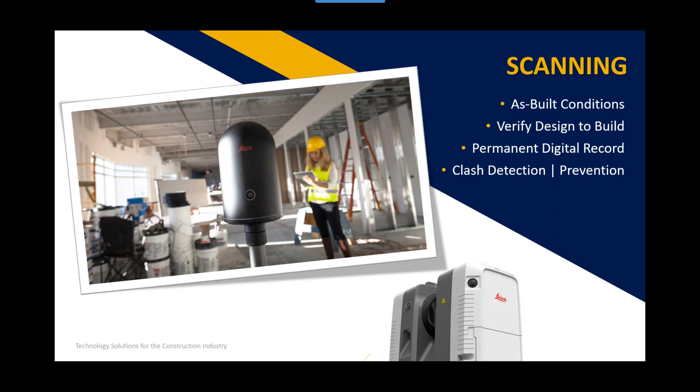And lastly, where 3D scanning comes in handy is in clash detection and prevention of problems. Trying to have foresight, looking forward to preventing an issue rather than allowing it to happen and then having to fix it later.

So, what is 3D scanning? Essentially, precision measurement. A scanner shoots a laser beam out and measures its return, and it plots that in a file while you don't see it. It's a mathematical equation on an X, Y and Z axis that gives you, depending on which scanner you're using, tiny millimeter accuracy over some distance. And so this way you're able to very quickly determine measurements without missing anything, without having to go back, and we'll talk about that in a second.

So when the scanner shoots the laser out, it creates a point cloud. Now, we all know from the 2D scanning world that we're going to create a raster image, and that's just a series of dots that represent what the scan is. Well, to a certain extent, that's what a point cloud is, except it's vector-based information. So a point cloud is essentially where the laser hit and measured back, and so you're able to get, based on density, a much better, accurate representation of what you've actually pointed the laser at.

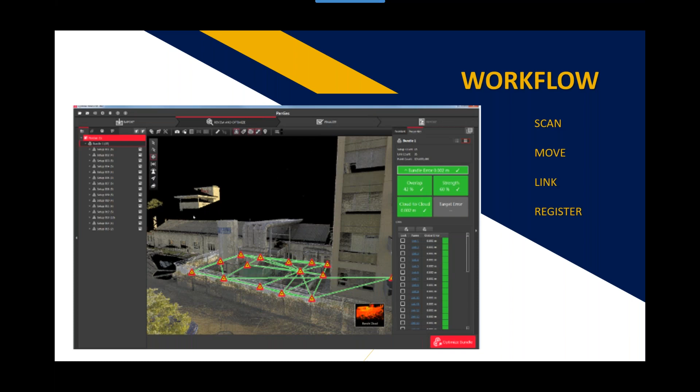The workflow is fairly simple. I say it's fairly simple, but the other folks are going to tell you how complicated and how much work it is, and it really is. I come from it from a different perspective. But you have to scan, you move the scanner, you overlap as much as possible, you link your scans, and you register the images. And that sounds really simple, but there's a lot of work that goes on behind it. So just to give you an idea how that work looks. So these are the basic areas.

Like I say, the as-built conditions are a huge thing, and they are. BIM modeling is also an opportunity for scanning. They scan in the oil and gas world, especially for piping, and we'll see an example of that in a second, that relates also to wastewater treatment plants. Architectural documentation, especially historical objects. The measurements are so tight that you can put that together quickly, easily, saving the file, and having that for archival purposes.

The construction laser scanning, I mentioned the pours, and we also get into ground penetrating radar at some point in time, and power process and plants, and that's all going to go mixed together with oil and gas and the water treatment. Here's a couple of examples. This is the University of Maryland. They basically scanned this building. Scanners do not see through walls, so if you have a classroom building, there's lots of movement, lots of scans. The point cloud was created, cleaned up. The CAD file was created, in this case in Revit, and then rendered. So all the steps to a final deliverable.

And Joe can probably tell you exactly how long this took, but as I recall, this contract was approximately a $50,000 contract. In terms of the hours, it worked out to be about $200 an hour to get to that point.

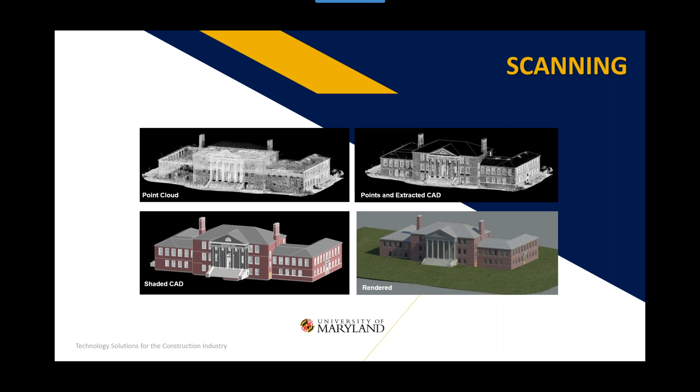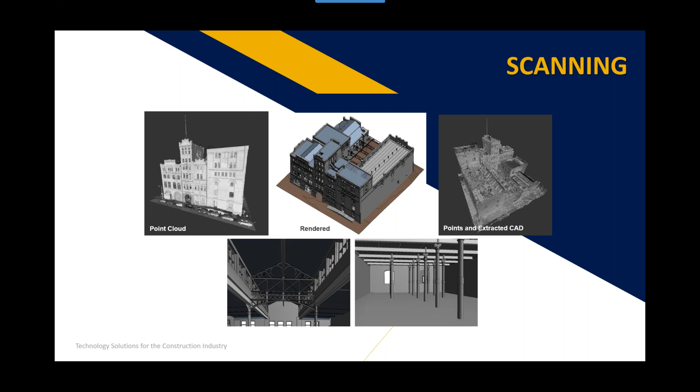Another example, a brewery in Tennessee where they were repurposing an existing structure to make loft apartments. So they had to come in and scan. Once again, you had the point cloud created, the whole image cleaned up and then rendered to CAD, and then ready to put into Revit to build out the loft apartments. The National Aquarium is another example. Here we're going to look and see if something will fit where it needs to be. They needed another water pump.

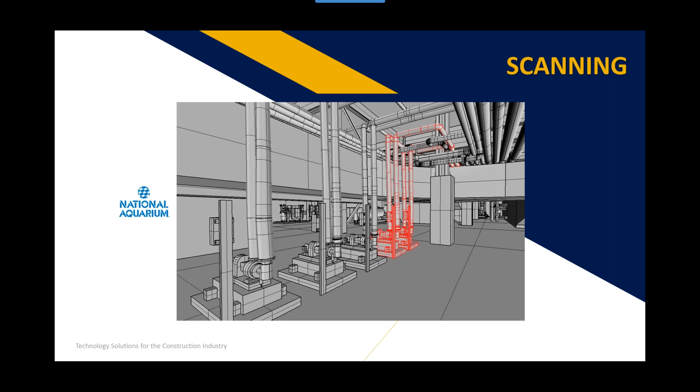This is the existing area where the water pump needed to go. They wanted to model that ahead of time, so you needed accurate dimensions. They scan, basically create the CAD, put in the next water pump and route the pipe around the existing pipe so that you can see exactly how it's going to go, how it will fit, so that they can design that and then actually put things in place. So, pretty simple in what the purposes are for.

But there's value all across the scanning spectrum. From conceptual condition surveys, which we just looked at with the piping and the pumping, to design. Basically you're going to do a renovation, so you want to attach to the as-built, make sure that you have everything correct, and validate the concept. The verification process, eliminating change orders and reducing delays and costs. If you keep the subs honest and do verifications at each milestone, those are service opportunities for the reprographics provider to maintain a position in the as-built chain.

And then lastly, many of you may already have closeout programs or some form of closeout that you work with your customer on, and 3D scans are fitting nicely into closeout and facilities management. That is the owner's manual of the building and how to run it and how everything is put together.

One of the things I didn't mention there is what we're starting to see a lot more of. As something is built, you do a 3D scan of the existing area before the skins are put on, the walls are put on, so that you can see the wiring, the plumbing, and all of that. And then you can geotag, that is, maybe take a photo, put it actually into the scan, add some text to it, and give instructions as to, well, that's the main electrical line, or this is the sewage plumbing here,

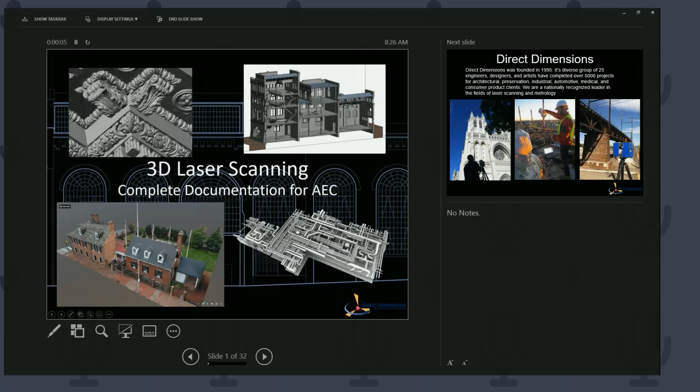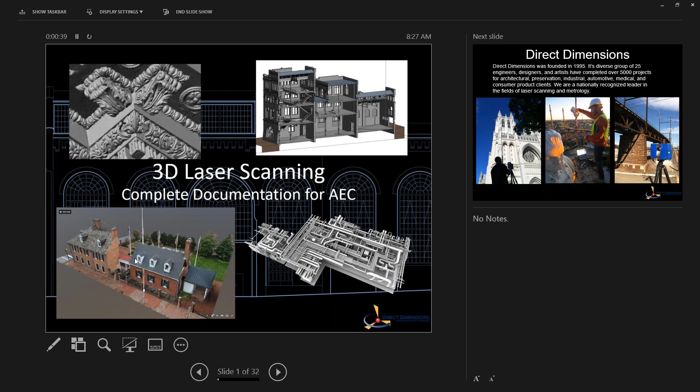So, as I said, we're at Direct Dimensions, founded in 1995. There's 25, maybe up to 30 of us now. We've done thousands of projects, and we're not just in the AEC space. We're doing historical preservation, we do industrial stuff, we do a lot of military applications, we do medical. We just finished scanning all of the props, sets, vehicles, and actors for the last Avengers movie. Hollywood's a big space for us, and they are scanning everything for those movies. It turns out Robert Downey Jr. cannot fly.

So we got people trained across all different industries. That's a question that we get asked a lot: who in your firm do you send out to do this work? And the scanners have gotten very user-friendly. The best background you can have is knowing how to run a computer, honestly. But we have engineers, we have designers, we have artists. My background is actually archaeology, and I came into this from a scanning historic sites perspective. I've been doing this almost 20 years now.

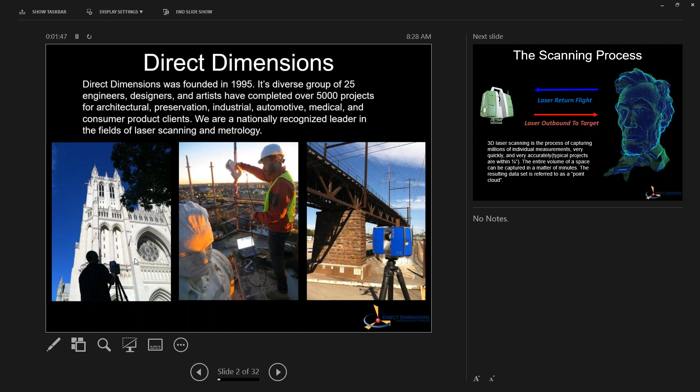As Keith said, this is the scanning process. So you're capturing millions of individual points, and the resolutions and accuracies you need are going to vary. We do everything from an open pit mine to literally capturing fingerprints. It can all be done with laser scanning.

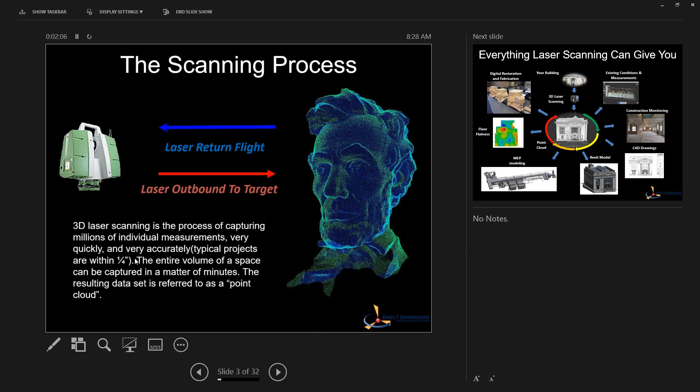Here's a little bit of a busy graphic, but this is what we're talking about. So you go out and you scan your building, and then you get the point cloud, and then these are all of the different things that you go to from there. And I'll try and zoom through a case study for a few of these. And as you can see, it gets harder the more involved you get in these.

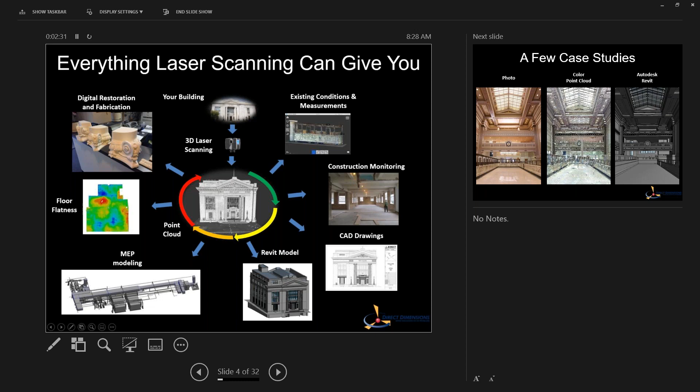There's just a quick side-by-side. It's a bank building in DC. So there's the picture of it, and there's the color scan, and those are just millions of individual points in the scan. And there's the Revit that we derive from it.

And I guess maybe that's a point I should make right now, is that we're kind of involved at all levels of this. We'll go out and do the scanning in the field, and we have clients that will just take that point cloud data. And you'll see this as you go out and talk to these AEC firms. They're at all different levels of sophistication when it comes to this.

We have clients that'll just take the point cloud, they say thank you, and then they go and do all the modeling themselves. We have clients where we have to do all the modeling. We have clients where we're doing the modeling and the drawing, and we're involved in all different levels.

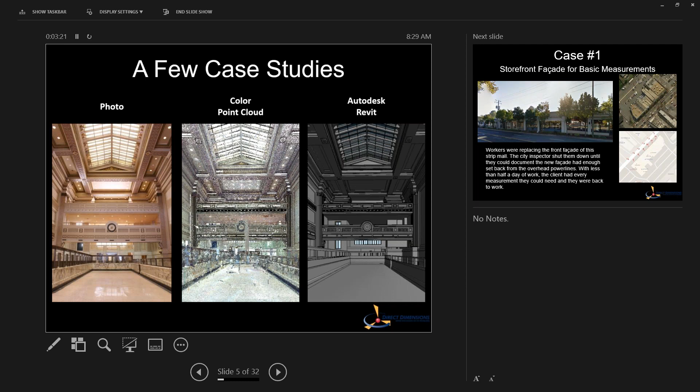Case one, this is a real quick one. This is just the point cloud. They're redoing the signage in the fascia of this strip mall. So the inspector happened to be driving by, said, hey, you've got scaffolding too close to those power lines. Well, he just made that judgment call and shut down the site. So how far were they away, really? Well, we ran out. This took maybe 2 hours. We ran out there from our office.

I should mention that too. Our home office is in Baltimore. I'm personally in Olympia, Washington. We have people in New York and people in Detroit now, I believe.

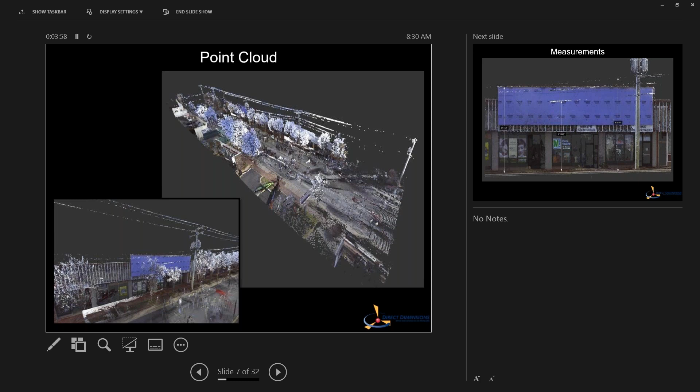This is outside of DC, so we just sent someone out there. They were on site in an hour. They took these measurements, and really quickly they're able to turn around and get all of these distances, all of these offsets, and the job site's back up and running.

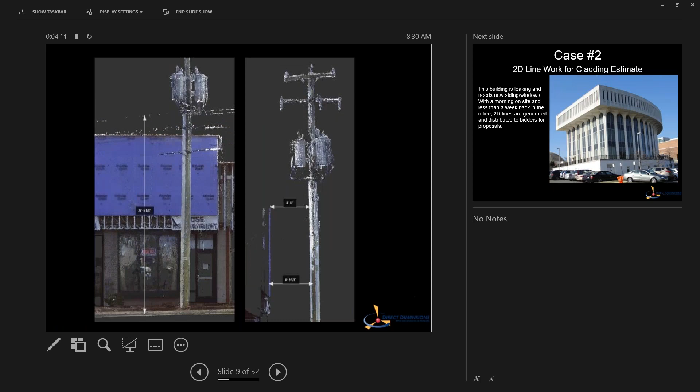Keith mentioned that something like 80%, I'd say it's probably higher than 80%, of buildings, there's no design in the computer for it. So how do you go about getting estimates for things? Especially, no drawing is good after the building's been built. You're almost always working off of the drawings that were created for the construction of that building.

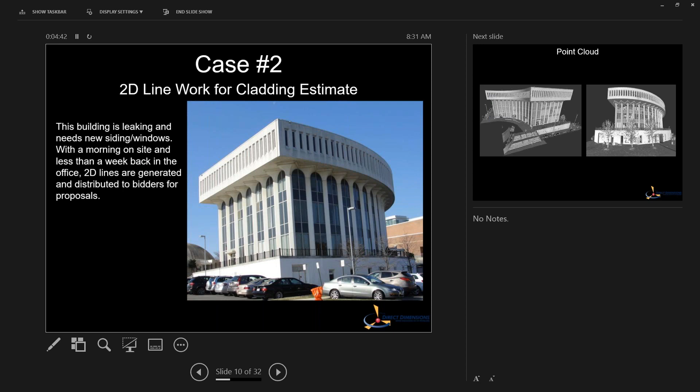So this one, they needed 2D drawings so they could go out and get a cladding estimate. So we went out and scanned it. This was about 30 scans. This took a couple hours on site. We take the point cloud and then we drop it in the computer and we extract the 2D drawings. And then these 2D drawings went out to all of their bids and they got a real accurate bid.

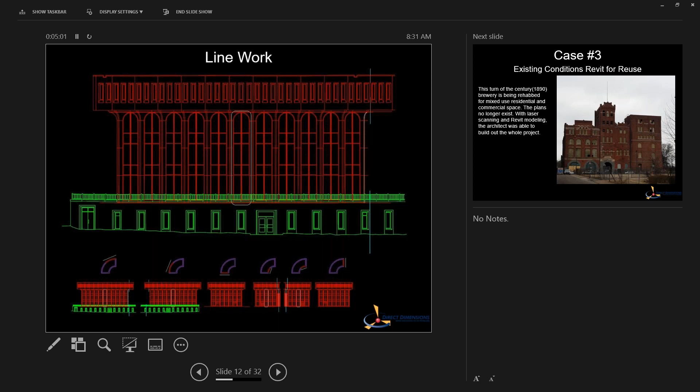Keith mentioned this one. I was actually on this one. This was a cool project. This was an old historic brewery in Memphis that was being turned into loft apartments, retail space, and a farm-to-table restaurant. I swear to you, I have done at least a half a dozen farm-to-table restaurants. Those old bus barns and warehouses and refrigerator factories that are being turned into restaurants, well, they all need to be scanned because they're not up to standards to put in a restaurant.

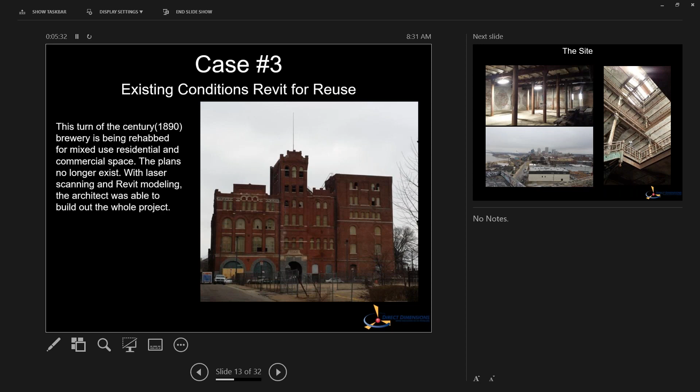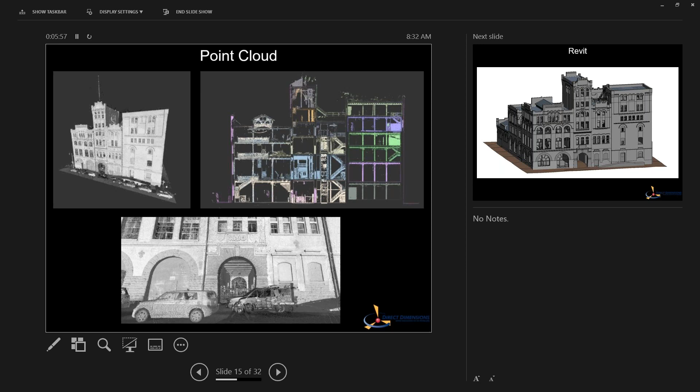The one thing I will say about this one is if you can look at that picture in the upper right, one of the really big things that they were looking for was this is actually 3 different buildings. And so they needed to know the relationships of the floors between those buildings. So they were going to cut holes in all of these walls to make this a single building. I think as it was right now, there was one hole that had been sledgehammered through between 2 of the buildings, and that was the only connection they had. There's the Revit.

Case 4. This is an important one. I have this graphic in every talk that I give, no matter who I'm talking to. So on a typical project, rework accounts for 12 to 15% of the cost of construction. You can all do the math on that. A laser scan and the ability to catch a conflict before they happen can reduce that rework to 1 to 3%. So this is saving people money. This is saving lots of money.

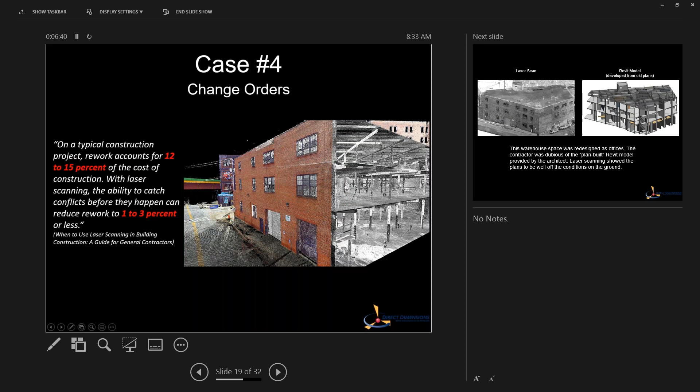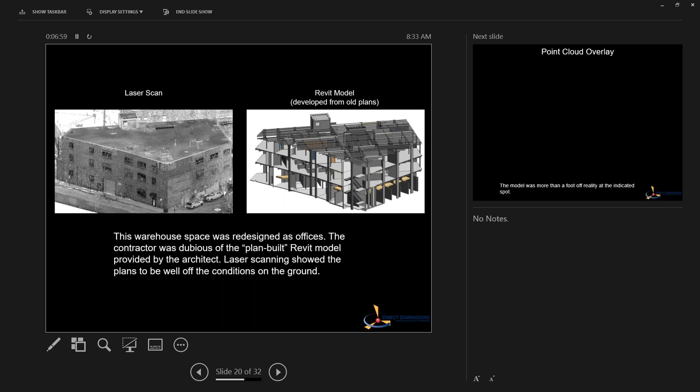And this is a white paper that's out there. Now, it's put out by Autodesk and one of the scanner manufacturers, so it's a little self-serving. But I still think it's a great thing to mention whenever you're trying to talk about this work. So this is a specific case where the warehouse was designed based on the old plans, which is what the owner gave to the architect. And they said, go ahead and do it. So the contractor hired us to go out and verify whether or not that was accurate.

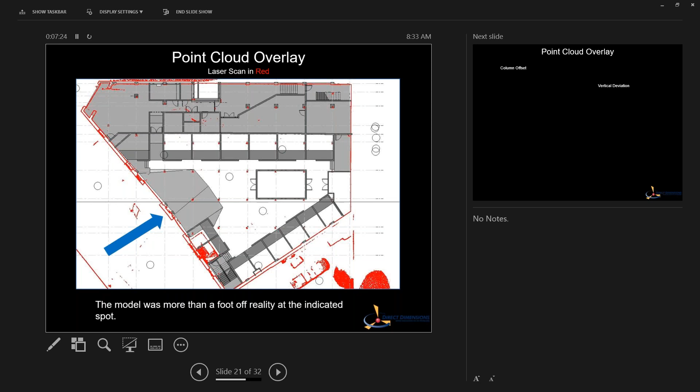And what we found was that right there at that arrow, it was about a foot off. So imagine cutting your steel and having it delivered to the site only to realize that you were about a foot short. Now, we tried to lay this out any number of different ways. We pulled the point cloud this way and that way, but it was always off. Somewhere, you're short-sheeting the bed. Somewhere you were going to be off. It was off in the horizontal and in the vertical.

That's a big one. Keith mentioned this as well. Floor flatness. We do this a lot. This is another one in DC, the specific case. This was an old commercial building that was going to be turned into a residential space. And they had different tolerances for the floor flatness, I believe, because they wanted to have those big rolling barn doors on it. So they needed some pretty serious floor flatness specs to be hit.

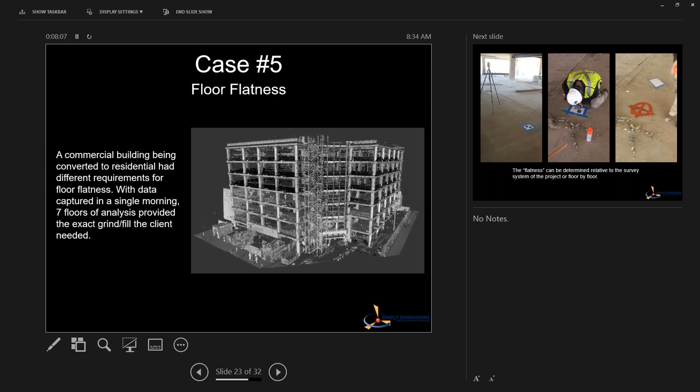So we went down there. This took 2 of us a morning, and we scanned all of this. And this was after everything had been stripped out. And then we went on site and we marked an X. So not only were we getting the floor flatness, but we were leaving behind our benchmark so that the people that were coming in and doing cut and fill had a benchmark to work off of.

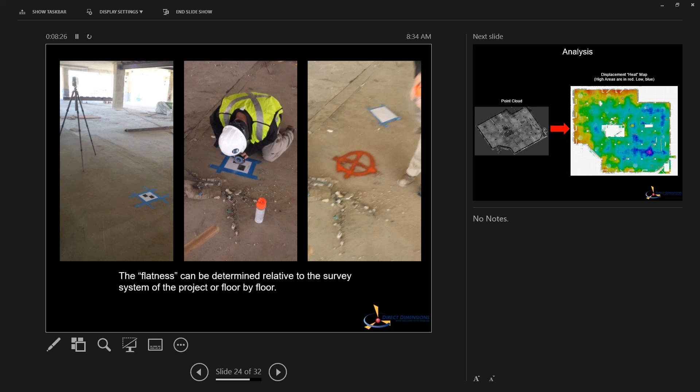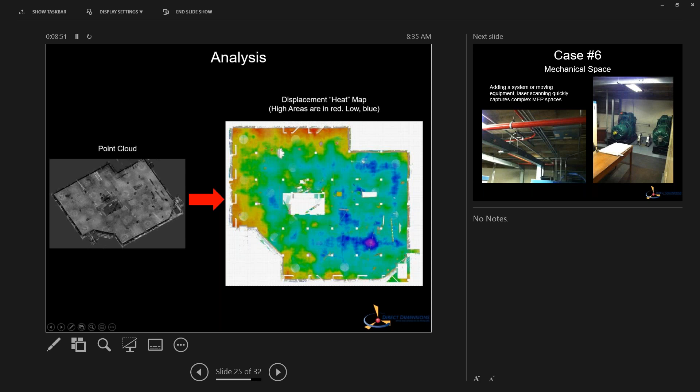And that's what that looks like. So that's the floor there, and what we call a heat map on the right that shows the high and low spots. And if you look at it, it pretty well makes sense. So these white spots, this is where there's no points in the point cloud because those are the columns. So in the middle of all these bays is where you're seeing the low spots. And that's from just slump, years of concrete being hung basically by those columns.

Mechanical space. So Keith explained this better than I can with these simple shots, but I'll just add that this is a great way to do clash prevention. Whether it's new build or whether you're adding systems, to be able to go in and rerun pipe routes, electrical routes, whatever, around the existing.

One of the first uses of this laser scanning was actually on oil platforms. By their very nature, they're always jerry-rigged. You get a problem out there, you don't have time to go back to the office when you're out on an oil platform. You just need to run pipes. So when they do major overhauls, this was the quickest way to get an existing as-built.

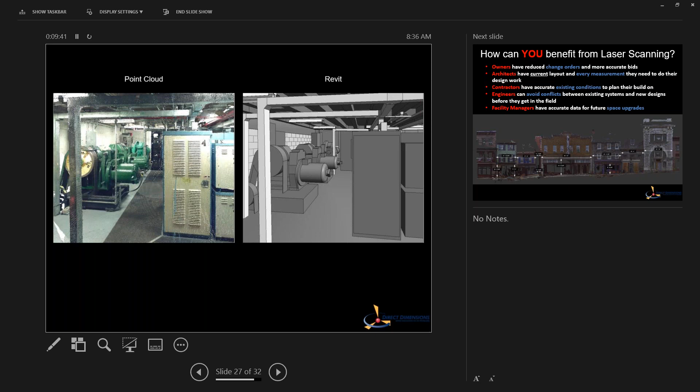All right. This is supposed to be all of your clients, I would say. The owners have reduced change orders. The architects have every measurement right there at the computer, at their fingertips. The contractors have the existing conditions that they can make these construction decisions based on. The engineers can avoid conflicts. And the facilities managers can look at their space holistically all at once. You know, if you have 18 units that are occupied by different tenants, you can just pull back and look at different configurations of the spaces.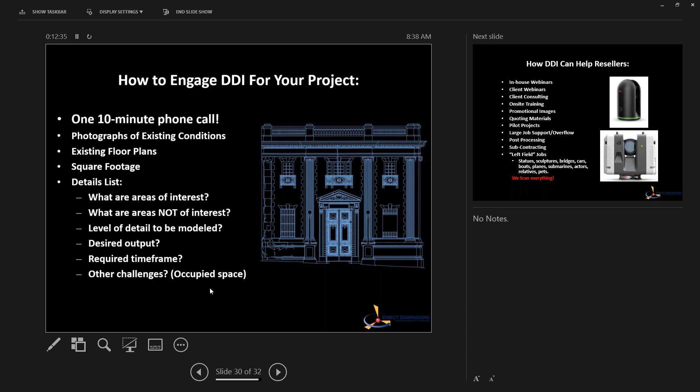Okay, and then I threw this one in here as well. This is how DDI can help resellers and reprographics firms. So we have been partnered with Synnex for, let's say, like 3 years now. And we've been working with Keith and talking to his clients. And these are some of the services that we've actually offered and done for reprographics firms.

In-house webinars. So if any of you want a more detailed discussion, and I'm talking about more of a sales talk from a salesman, I'm pinch hitting today for our head sales guy. And he can get on a webinar with your staff and talk about how we talk to clients about getting this service done. We can do client webinars. I do lunch and learns all the time. Go out and talk to architectural groups, engineering groups, whoever. We can get on the phone and talk to your clients.

We do on-site training. So if you buy a scanner and you want to learn how to get it out in the field and how to take scans and where to set up the scanner when you're in the field, we have people come out on our jobs and do work with us. Promotional images, you saw Keith stole some of my images there, so we can make some of that stuff available. Quoting material, I have that slide in here. We have an intake sheet for talking to clients about what they would like to get in their job.

A pilot project: if you have a client that is looking to do laser scanning, but you don't want to jump in with both feet, we can be your scanners for that project. If you get a big project that you need some help with, we can do that. We can do post-processing. Subcontracting: we've turned around and had repro firms do scanning for us. So if we didn't want to send a guy out to a site, it was a small job, we just contacted the repro firm and they sent their guy out and scanned.

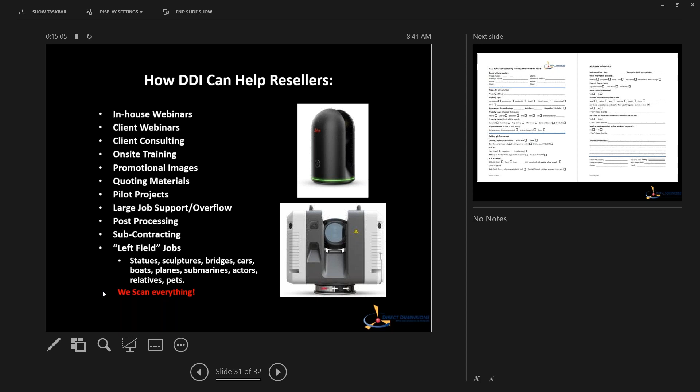And then left field jobs. Like I mentioned at the beginning, we scan everything. Statues, sculptures, bridges, cars, boats, you name it. We've scanned everything. So if you get a client that says, hey, I need to scan this quarter scale model to put it into a Revit model, we've scanned stuff like that. I was in Orlando years ago to scan the volcano that's now part of Universal's volcano theme park when it was just a clay model in a warehouse.

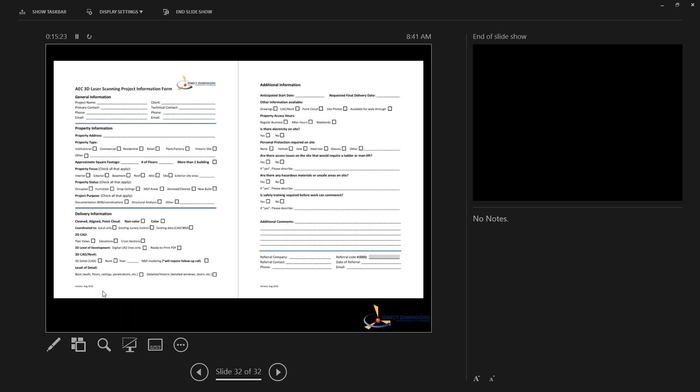And there is our intake sheet. And this is pretty straightforward. This is just kind of a bunch of check boxes that allow you to ask the right questions of your clients in terms of getting a job.

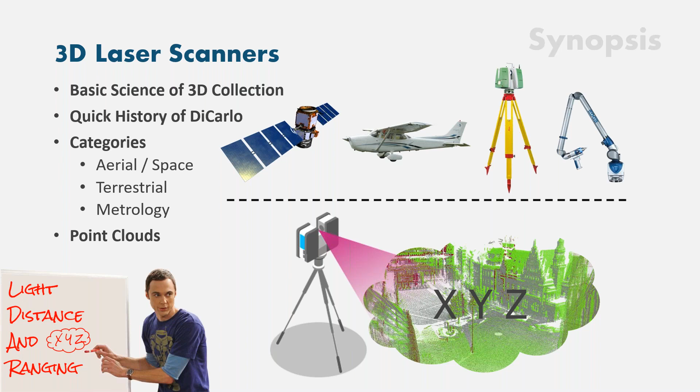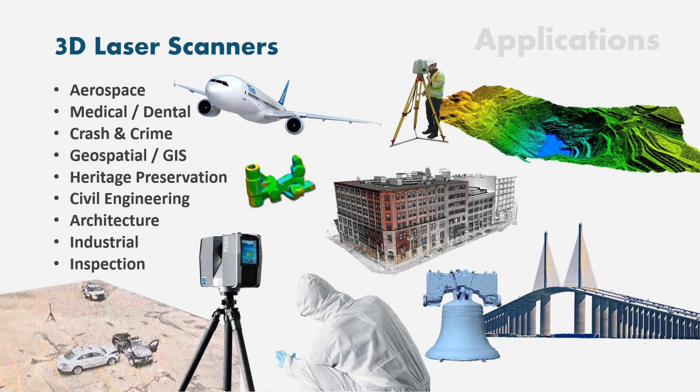Again, at this point, it was not the simplest thing to get into, just because we had to figure out what kind of hardware and what kind of software we're going to be running. And that's on my next slide. We had the opportunity to work with a lot of these hardware manufacturers, so we had to make a decision on the laser scanner. We ended up going with Faro as the manufacturer for the laser scanners. We have dabbled in many of the other manufacturers too, but we are mainly a Faro service provider. We do sell these units, but we also rent them, and we do a lot of training and support on them too.

So we're trying to not just support one instrument and the sale of it, but, just like Joe mentioned, do a little bit of post-sale support, do a lot of training, and get guys who have never done something like this comfortable with running it. Obviously, you see that there's other companies. We're also involved a little bit with Trimble. We've done work with Leica. We are a Topcon house also. Even though their laser scanner is not something we've sold many units of, we're mostly focusing on their total stations and GPS instruments. Surphaser and StoneX are another couple of manufacturers you will be running into if you're interested in selling them.